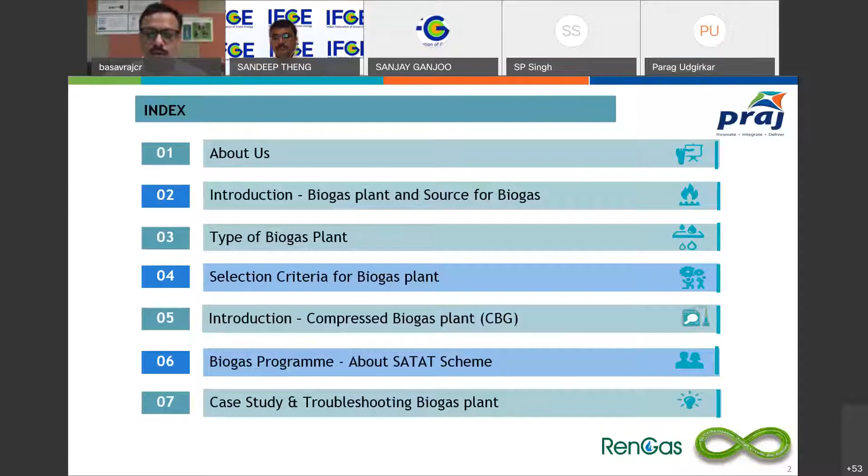So, in a couple of slides, I'll talk about Praj Industries, and then enter into the subject - what is a biogas plant, what sources are required, and the different types of biogas digesters. The types of reactors available for small scale, large scale, and industrial application, and the selection criteria, how we should be selecting. Then introduction to how, once biogas is generated, it will be used as a gaseous fuel called CBG or bio-CNG, and the very ambitious program of Government of India, the SATAT program - I'll touch upon that, and some case studies and troubleshooting, so how input output looks like for a typical capacity.

So with this, some corporate information about Praj Industries. It started in 1983 by our promoter chairman, Dr. Pramod Chaudhari, and since then he had a vision that we should be backed up by an R&D center.

Since then we have had R&D in-house supporting all the technologies. Later on, we had an IPO in 1994, and then we ventured into Southeast Asian markets like Thailand, Philippines, Singapore, and all. Then gradually we moved to the American market, and then we set up Praj Matrix R&D centers.

So we were there in 1G bioethanol—when I say 1G, the ethanol generated from sugary, starchy feedstock. Then in 2008 till 2014, we scaled up second generation bioethanol, meaning biomass-based or cellulosic, lignocellulosic-based bioethanol technology.

And then we entered the high purity segment through inorganic growth, acquiring Neela Systems. Then we had our first integrated 2G biorefinery, which we entered in 2017 onwards, and then we have gas—RNG, renewable natural gas, which we call in other terms compressed.

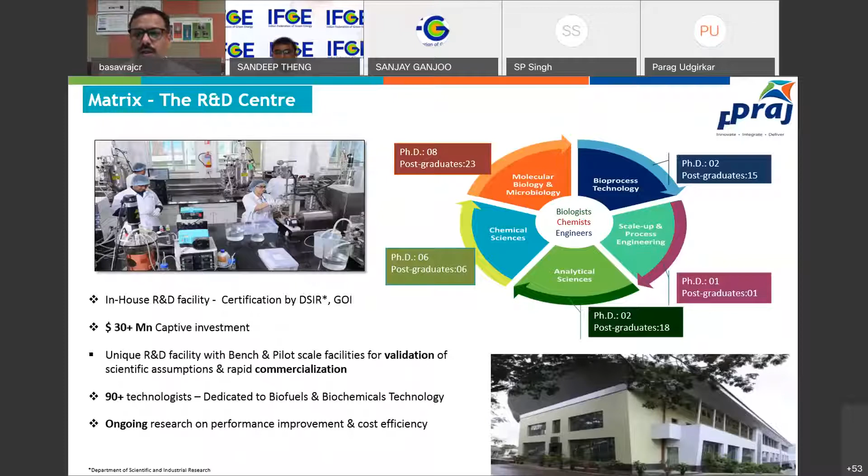As I said, the matrix is the backbone of our technology. Our R&D center's major focus is on bioprocessing technology, and biogas is also part of that—that's why I'm giving this background, to show where we are coming from. We have developed our proprietary consortia for pre-treating raw materials and processing them to increase biogas generation in the anaerobic digesters.

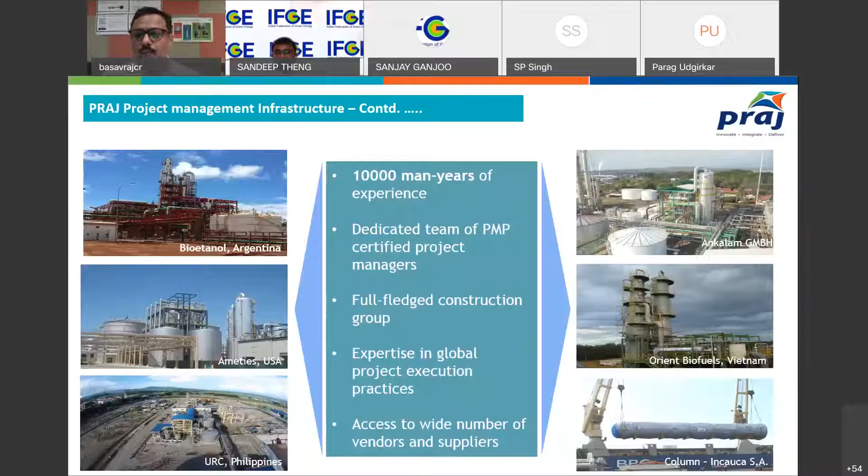So we have a very strong project management team to support large-scale project execution in Argentina, US—we have executed projects in the US. The largest ethanol plant we have executed is in the UK, a 1,200 KLPD ethanol plant for Vivergo. So these are some glimpses.

With all this, what is our drive? We want to contribute to biomobility for the country's drive—biomobility which will decarbonize through circular economy. As we know, the major demand of GHG emissions comes from the transportation sector, and stubble burning is causing a lot of issues in the northern part of India. So how do we cater to this, and what alternative solutions do we have wherein we can generate energy out of it?

It could be biogas or bio-CNG or ethanol, and our colleague Mr. Ahujaji already mentioned briquettes are there too. So there are a lot of other solutions based on permutation combinations available and the availability of raw material, and we have to offer the solution. So biomobility is based on transportation, helping carbon footprint.

With this background, I'd like to enter into the subject. So just as an introduction to biogas—what is biogas, basically? Biogas, by definition, is when we degrade any organic matter in the absence of oxygen, it releases some gas. That gas is called biogas, and this reaction happens in anaerobic condition.

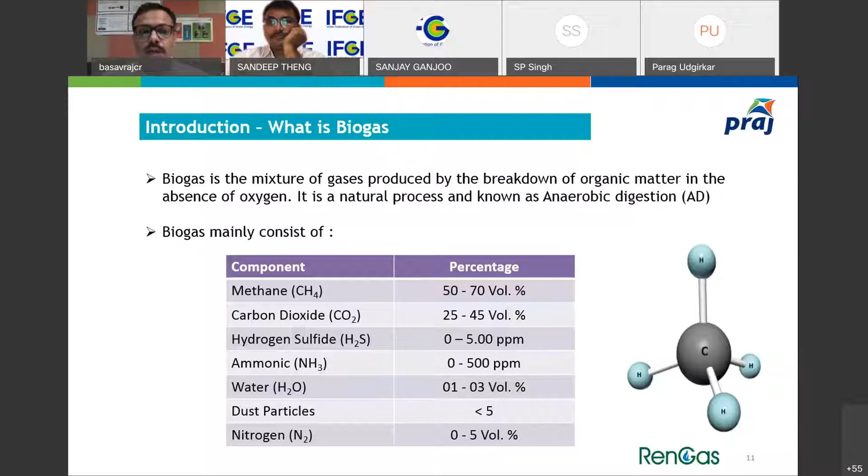So how does this biogas plant help in terms of reducing—why should this biogas plant exist? In the first place, this solves the problem of treating effluent at industry grade. If we have to treat any organic effluent, and it has a COD/BOD ratio of 0.5, that can be treated through biomethanation.

Earlier, biogas used to be treated through an aerobic route. This aerobic route consumes a lot of energy, and if I treat the same waste—any organic waste, solid or liquid—it needs a lot of energy through the aerobic route. Similarly, if I treat this through the anaerobic route, I need very minimum energy input, and it will generate one more renewable energy called biogas, which has more than 50% methane content.

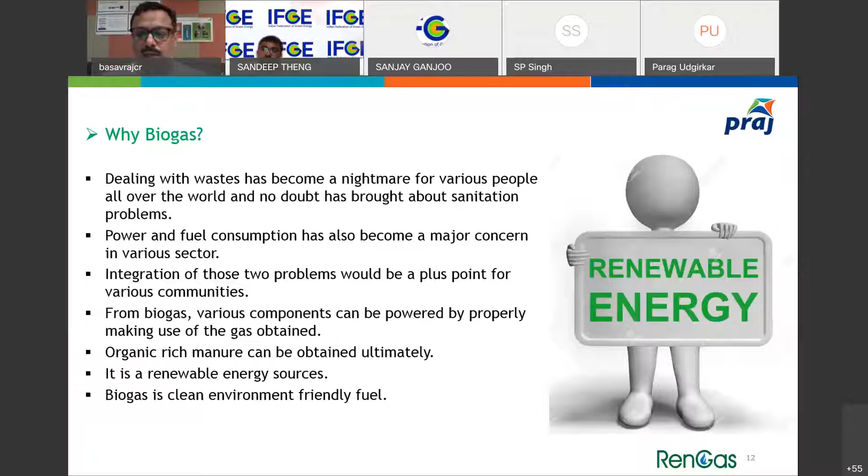This gas can be used further for various applications, which we will look into. Apart from that, it generates two more co-products: organic manure in the form of solid and liquid organic manure. So in a way, the biogas plant gives three outputs: one is gas, and the other two are solid manure and liquid manure.

So what are the sources of biogas? As I said, organic waste from commercial or industrial establishments could be food waste, market waste, vegetable waste, mandi waste, and all those things fall in this category. And there is another source like landfill, as municipal solid waste—one way of treating this is through landfill gas.

Landfill gas is also an anaerobic process, where all this organic waste is filled in the land and covered from the top. After a year or so, gas is extracted from the landfill site, and it contains methane along with other gases. One point I'd like to highlight is it will have low methane concentration, with impure gases like siloxanes and syngas. It needs a higher level of purification to utilize it in other applications.

And one more source of raw material could be sewage waste. When we treat sewage effluent, it generates a lot of aerobic sludge, which is a very potential source for biogas generation. So in an STP, just to give a ballpark idea, a 100 MLD sewage treatment plant can generate about 200 meter cube of gas.

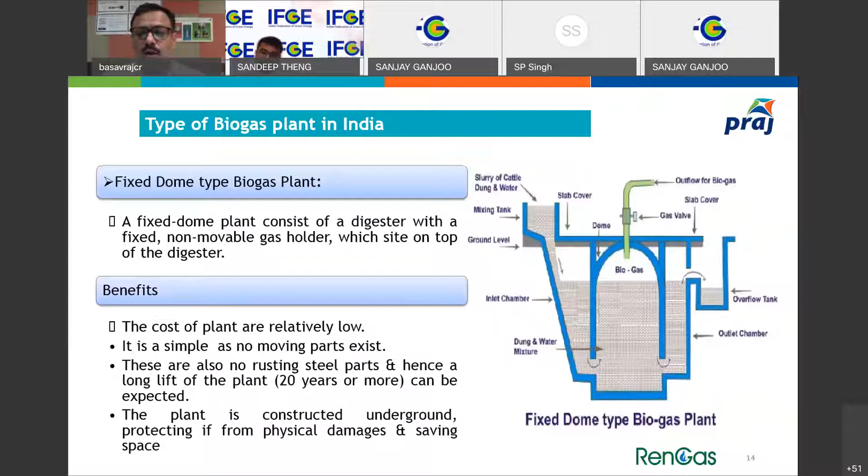There are some technologies called KVIC technology and others, but in a broad sense, these are not very big size biogas plants—around 100 meter cube or so. The second type is a floating type biogas plant, where the gas holder floats on the substrate which is subjected to degradation. It is designed in such a way that the dome or holder holds all the gas generated from the substrate.

Here again, the substrate mainly used in these kind of plants and reactors is food waste and cattle manure. Whatever gas is generated is stored in the gas dome, and it has been designed in such a way that the gas is not allowed to escape from the reactor.

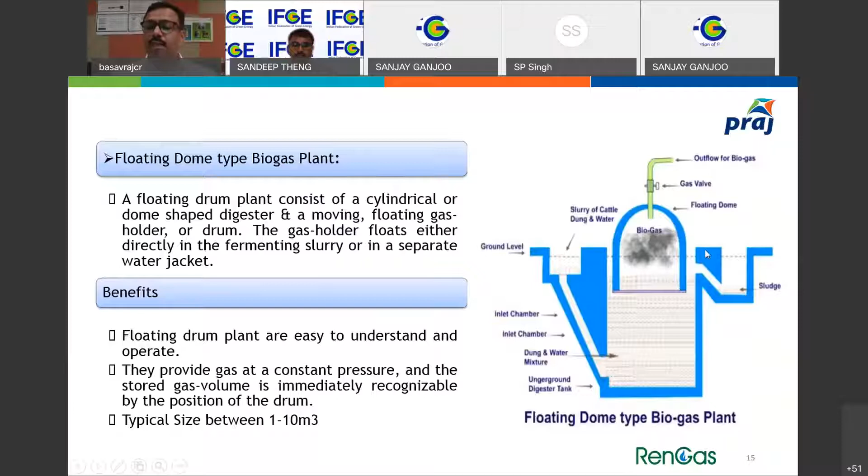So these are the plants which are available. The next level of industrial reactors available in the market, which we are also offering, is a plug flow reactor. These are available in both operating conditions, mesophilic or thermophilic.

Some designs have an agitator inside the reactor, but in our process we don't use any agitation. We mix the substrate through gas mixing, which has a lot of advantages because the operating cost is very low, and the important point is all kinds of feedstock can be treated. It has a distinct advantage. When I talk about the reaction part later, I'll cover how plug flow reactors are better compared to other conventional technologies.

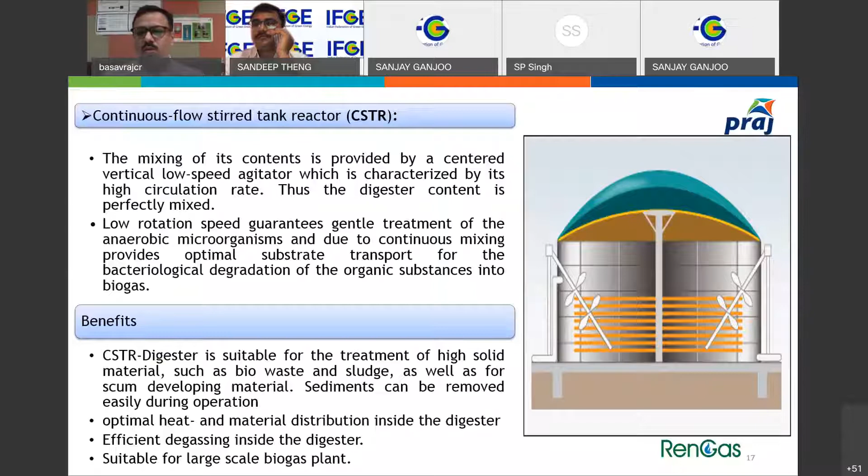So what are the factors affecting biogas generation? As we all feel, biogas plants - we've seen it from our childhood - it's a very simple process. But when we talk about industrial plants with the economics around it, when we are investing, we need to do it properly. It has to be a properly engineered biogas plant. It can't be just a reactor where I subject some substrate and some gas will come out. Because we are investing heavily in these reactors, and to establish this complete project, we need to consider a lot of factors while designing and operating the reactor.

So the important parameters - we need to have the right pH in the reactor. When I say right pH, what is it? It should be in the range - it should not go below 6.8 and should not go beyond 7.8. Why is this pH required? Because of the generating bacteria - probably I'd like to use this slide to explain this.

The second, third and fourth phase of this reaction - I'll talk a bit on phase 1 and phase 2 - but to give an example to illustrate, these methanogens are active only within a certain range and are very sensitive to pH. So if pH goes below 6.8, the methanogens will not be active. If these are not active - and the major focus of this entire process is to generate more methane - so if this consortia are not active, or dormant, or if they die, as I said, they are very sensitive towards pH and temperature. So we need to maintain appropriate pH in the range of 7.

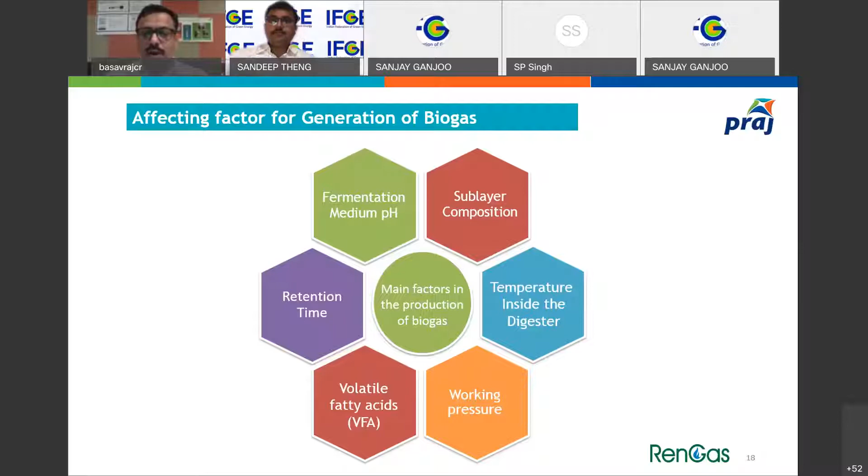And then the appropriate retention time is a very important parameter. Coming to the reaction process, how the entire biomass or organic fractions get converted to biogas: it has 4 distinct processes which are very much required to get very high concentrated methane in the biogas and the desired yield of biogas per ton.

I would like to mention these reactions distinctly. If I use a feedstock like spent wash, here phase 2 and phase 3 are very fast reactions. For that matter, even phase 1 hydrolysis is also very fast. But in the distillery spent wash also, phase 3 to phase 4, acetogenesis to methanogenesis, is a slow reaction.

But when I'm talking about other feedstocks like biomass, press mud, and food waste, the first 1, 2, 3 phases get elaborated and need more time. That's the reason this has to be operated under 2 different operating conditions. And there is a very high probability, when it comes to biomass based feedstocks, if it has diglycerides...

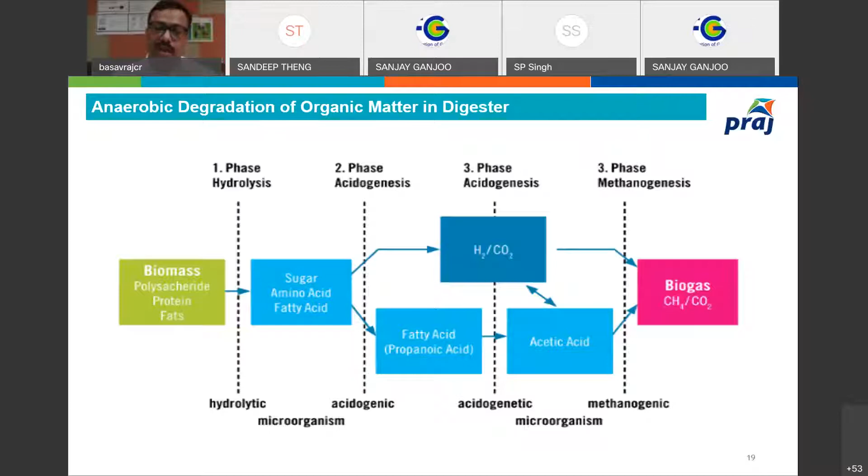...and when I say rice straws and such, polysaccharides generate propionic acid, which is very toxic to methanogens. So we need to do the proper analysis of what level of propionic acid is there. We have established, for a particular feedstock, some level of these acids that should be maintained in the reactors, and based on that we operate our plants.

With all these due considerations, there are still some issues around these kinds of biogas plants. The problems we generally face in biogas plants are: gas yield gets dropped during the course of operation, methane concentration drops, there is a huge possibility of foam generation in the reactors, and there is a possibility of pH getting dropped.

These are all the most probable causes. The possible causes for this could be reduction in the feed to the reactor. We assume, let's say, 100 tons of rice straw is fed every day, but actually if only 80 tons per day is fed, then we tend to depend on the operators. We need to keep a complete eye on the operational crew also, to check whether the desired quantity of substrate is fed or not.

When the methane concentration drops in the reactor, the possible reasons could be either the temperature drop, or the volatile fatty acid has increased in the reactor, or the reactor is operating under high pressure. All these parameters need to be checked. That's the reason we operate our flow reactor at a very minimal pressure. With these kinds of feedstocks, there is a possibility of foam generation and scum generation, and we need to know how to break these foams and scums.

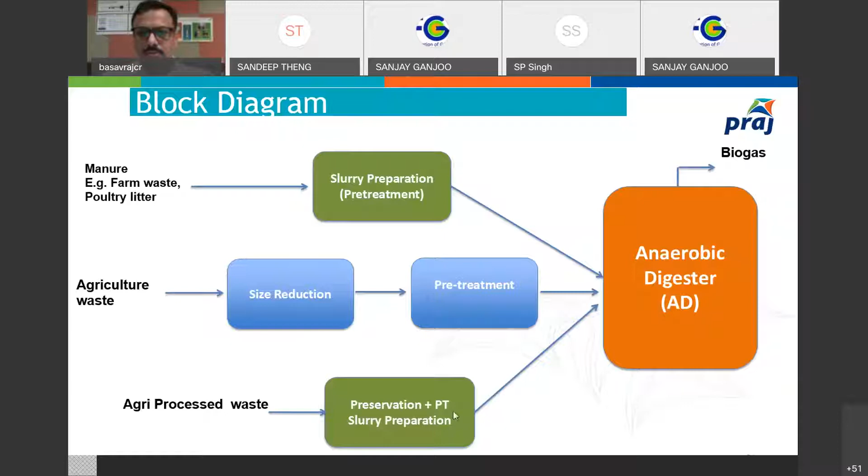So I tried to give a complete overview of how it looks like with different feedstocks. As I explained, three different feedstocks like farm waste, industrial waste, kitchen waste, and agri waste. Based on the feedstock, the level of pre-treatment varies, and then it's subjected to the reactor. After that, it will have three products.

The main product would be the gas, and this gas we subject to compressed biogas. Before subjecting it to the compressor, we need to purify it to bring down the impurities present in the biogas. As I said, the biogas has a composition of about 55 to 60%, or maybe higher. We need to bring this to 90, 95, 96% purity level, and then we can compress it, and it can be used for different applications like transport fuel or gaseous fuel.

The second application of it could be the CHP process, combined heat and power. At this level, we don't need a very elaborate gas purification system, but we need to desulfurize the gas. As I said in my previous slides, it will have H2S content present in the biogas. We need to remove that, which we call desulfurization, and bring it to the level required depending on different engine makes and power output. These engines' efficiency could vary between 35 to 44%, and the waste heat recovery can be used for steam generation or other applications.

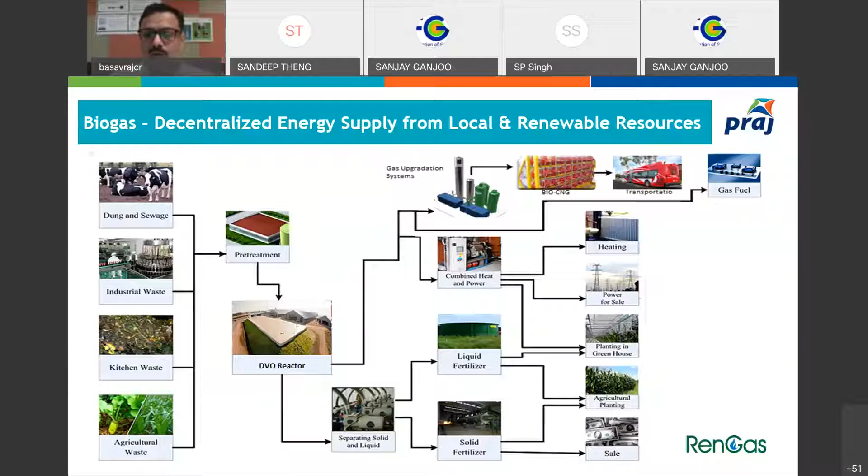The other co-product coming out of the biomethanation process is subjected to solid liquid separation, where slurry from the reactor is separated, and then it goes to organic manure. Recently we got the fermented organic manure certified under FCO also, which is very welcoming news for this industry, the biogas sector per se. The liquid manure coming out can also be further used as liquid fertilizer.

As I said, four distinct components are required while selecting a biogas plant. We need to consider what substrate I am using, whether it is the right quality, and the availability of logistics. PRSPL will explain more on the logistics part, like collecting rice straw and such from a distance, at what radius we can consider, otherwise the transportation cost will increase.

What quantity of substrate I am bringing, the type, and the next selection criteria would be what kind of reactor I am using. As I already mentioned, all the different types of reactors have their own advantages and limitations. Proper sizing of the reactor is important, it should not be undersized or oversized, looking at the economics.

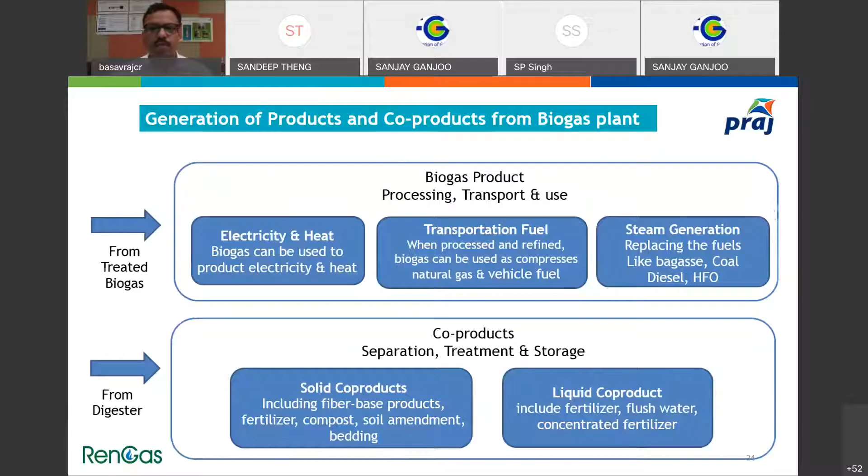So what is biogas, and what are the different synonyms of CBG? As I said, the methane composition in CBG should be more than 90%, as per IS 16087:2016. The initial gas, based on the raw material, could be anything between 35 to 65%.

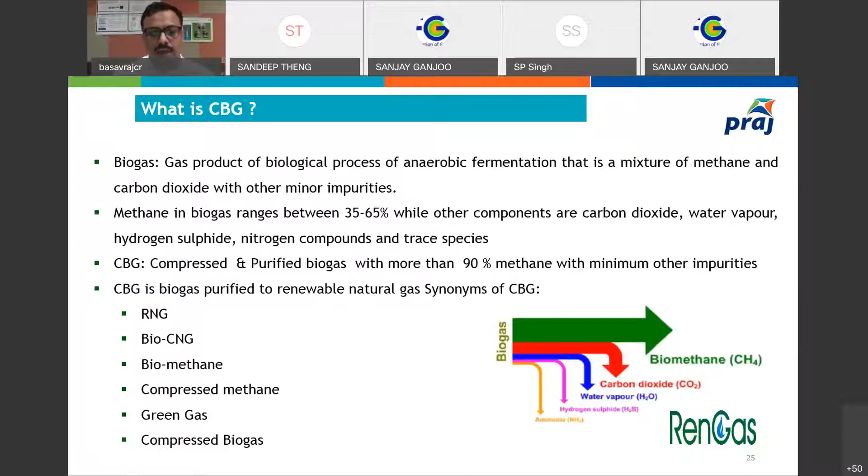This biogas, as you can see in the diagram here, we are stripping out all these impurities: carbon dioxide, moisture, hydrogen sulfide, ammonia, nitrogen. We are only interested in the methane. Once we strip out all the impurities, that is called CBG, or biomethane, or purified biogas. In Western countries it is called renewable natural gas, especially in the US, biomethane in Europe, and compressed methane, green gas, or compressed biogas/bio-CNG in India.

So how do the compositions of CNG and CBG differ? The methane concentration in both cases is 90%, as per the specs mentioned. But in case of CNG, we have other hydrocarbons, whereas in case of CBG, we don't have any other hydrocarbons, and there is a cap on CO2 of not more than 4%.

Since I don't have other impurities, nitrogen, CO2, and oxygen all put together should not be more than 10%. In that case, if I don't have nitrogen and other impurities, maybe 0.5 milligram per meter cube for oxygen and others, eventually I need to increase the concentration of methane to 95-96%. So it all depends on the substrate I am using and what composition of biogas I am getting.

So we discussed, as we've covered till now, the biogas plants and what parameters we need to keep in mind in operating the plant. And once the biogas is generated, how I am going to purify it to get CBG grade quality.

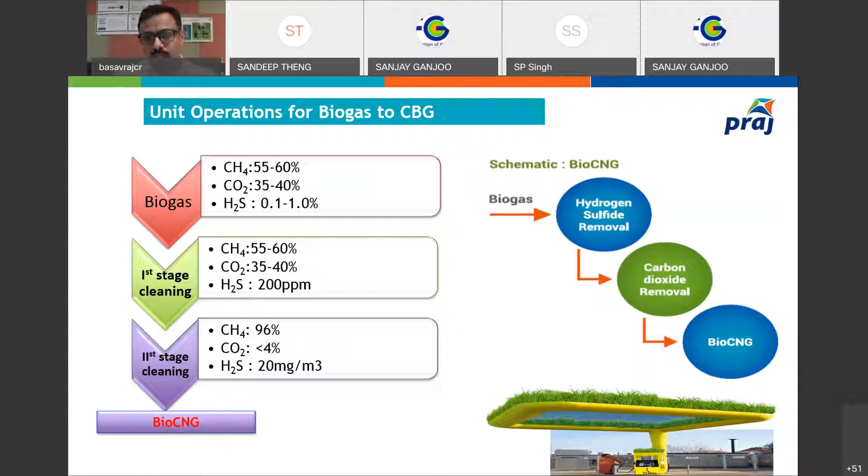It needs a foolproof desulfurization process. As we all understand in the industry, hydrogen sulfide is a very corrosive gas which needs to be removed, to bring it down to 20 milligram per cubic meter. So we should have a very rugged desulfurization process, then a CO2 removal system and a moisture removal system. There are three distinct unit operations required to get the desired CBG.

As I said, we are in collaboration with DVO Inc, United States of America. So we are offering a plug flow reactor. What are the USPs of the plug flow reactor?

As I mentioned earlier, here we can achieve hydrolysis and acidification in the first part of this reactor. This is like a plug flow, a rectangular reactor. You can see the flow path: the substrate is moving like this, then taking a U-turn, and it is going out.

In the first part, we are maintaining different operating conditions, and when it comes to stage 2, we are maintaining different operating conditions. One more important point about the plug flow reactor, which we can't do in a CSTR, is that we can maintain SRT.

In case of plug flow reactor, what we are offering is SRT equal to HRT. SRT is solid retention time, which is equal to hydraulic retention time. The solids coming along with the feed substrate, or the total solids, will have a similar retention time, because there is no channeling or short circuiting possible in this reactor. So along with this liquid substrate, also the solid has to go out.

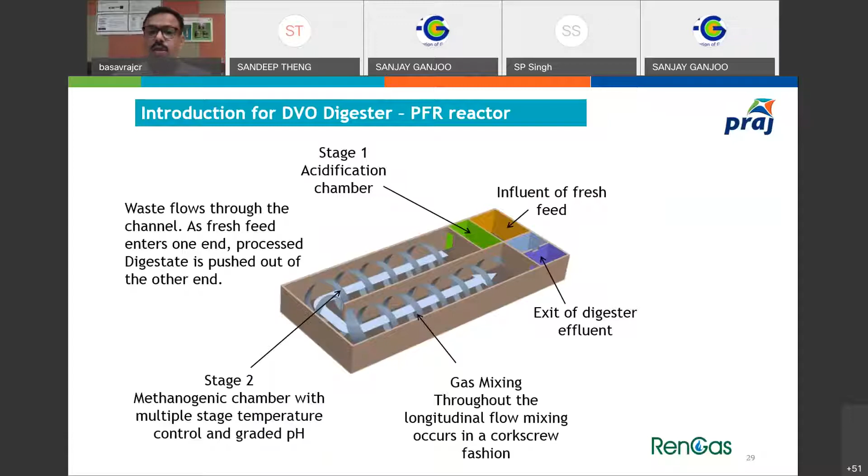That's the reason we have same SRT and HRT in case of plug flow reactor, which is not possible in case of conventional reactors. Once this gas is generated, we should have an appropriate desulfurization process. Based on the H2S levels in the biogas, we offer different kinds of desulfurization processes.

This is an iron chelating agent based desulfurization process, where we use the iron chelating agent as a catalyst to remove the sulfur present in the form of H2S, which gets converted to solid. You can see the sulfur coming out to this filter press, and the liquid, the iron chelating agent, is taken back for regeneration, then recycled back to the main reactors for further desulfurization of the raw biogas.

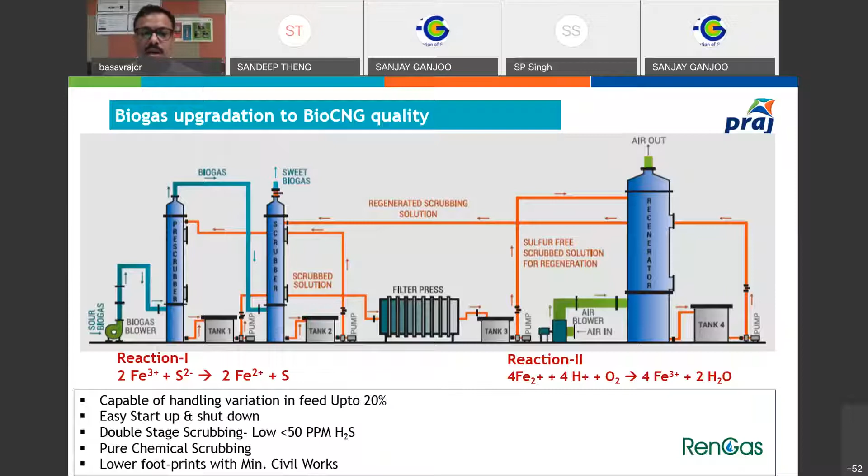The advantage of this is a very minimal quantity of sulfur chemical is required in this process. It is chemically self-regenerative in the process itself, so we only need to top up a small quantity for desulfurization. We also have an alkali-based scrubbing system, and based on H2S levels, if the chemical requirement is very less, we offer that technology as well.

After desulfurization, the second important part is we have to remove the CO2 from the biogas. In our technology basket, we offer both chilled water scrubbing process and membrane scrubbing process, and both have their own advantages and limitations.

In the chilled water process, the raw biogas after desulfurization is compressed up to 7 to 8 bar, then subjected to a scrubbing column, wherein the chilled water absorbs the CO2, and pure methane of more than 90% comes out. It then goes to the drying system, which is molecular sieve based, where moisture is taken out, and we are able to achieve the IS specs.

What happens to the chilled water used for the scrubbing process? We regenerate it back through the regeneration system. Once we flash this CO2 rich water, it liberates the CO2 out, and the water can be reused.

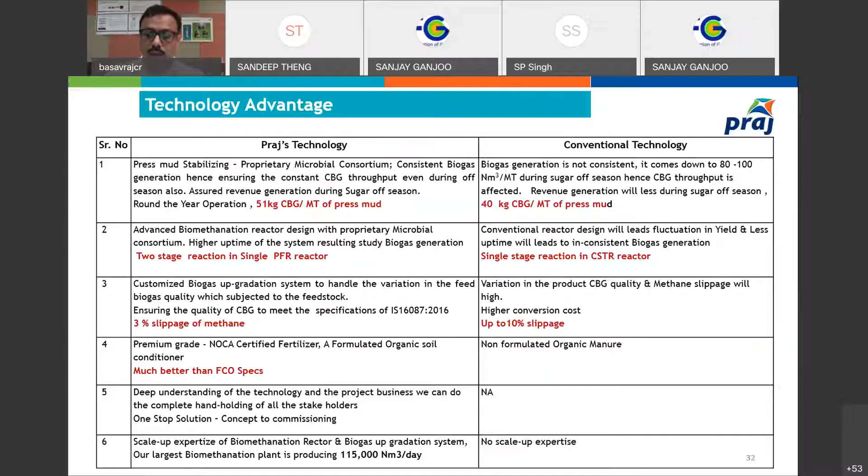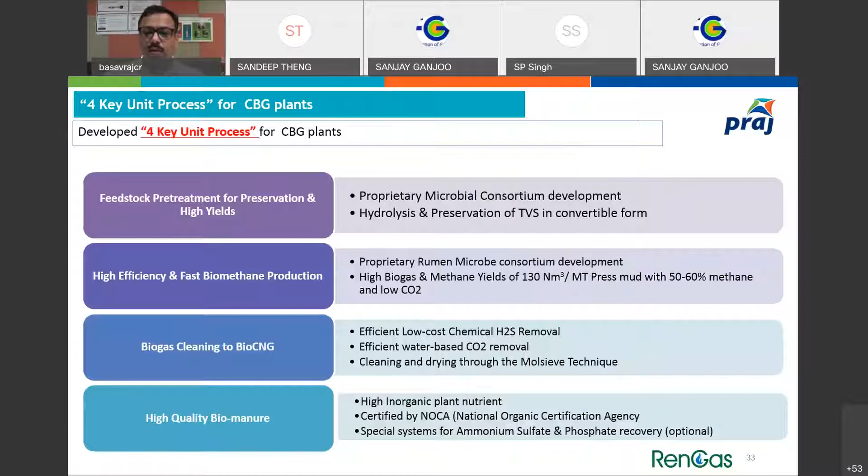We have learned with our experience of the distillery spent wash business. These are the 4 key unit operations which I mentioned. Because of that, we are able to get the highest yield, better gas purification system, and high quality organic manure, NOCA certified. These are some of the credentials where we got the NOCA certified manure certificates and all.

To take a typical case study, if I take an 8,000 TCD sugar factory, and it operates at 190 to 200 days, it will generate about 60,000 tons of press mud. We can have about 200 TPD of press mud available for round the year operation. The typical composition of press mud is about 25 to 30% solids, of which about 80% is volatile matter, and the remaining is moisture.

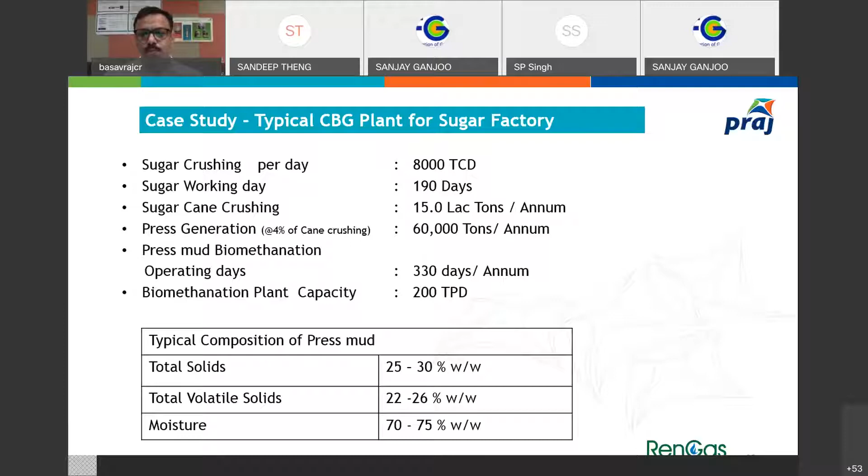So in all, the expected outputs with 200 TPD of press mud would give about 10 tons of CBG, solid fertilizer about 40 tons per day, and liquid manure in the range of 100 m³ per day.

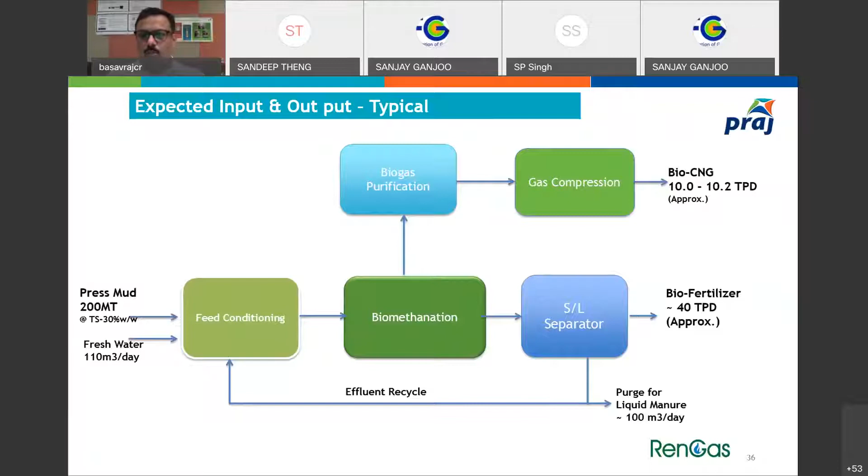If I want to use the similar feedstock for a biopower case, I would be able to generate about 2.5 megawatt of power with this kind of plant, with a capacity of about 200 tons per day process.

Why underground is preferred is the temperature. Maintaining the temperature of the reactor is very critical and important. Below 1 meter or 2 meters, the temperature variation of the reactor is minimal. That's why we should have underground reactors.

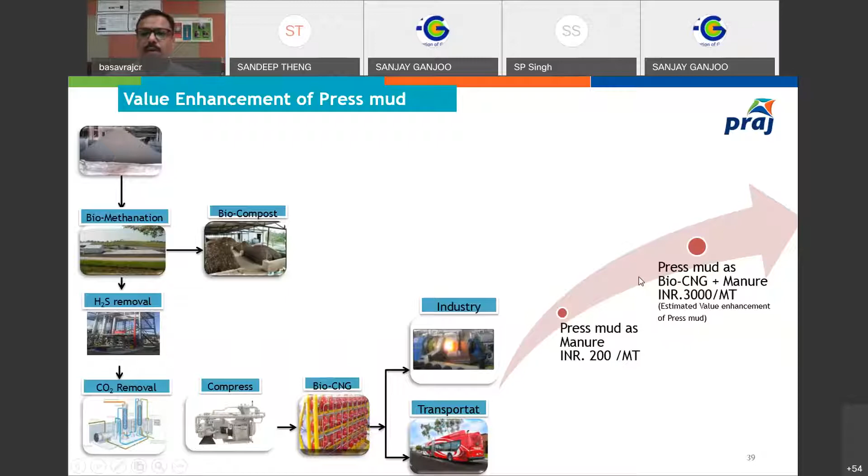So this is our pilot, followed by demonstration level, what we have done at Shreenath Mhaskoba Sugar Karkhana, which is near Pune. Just to show, we have achieved up to 98% methane in that.

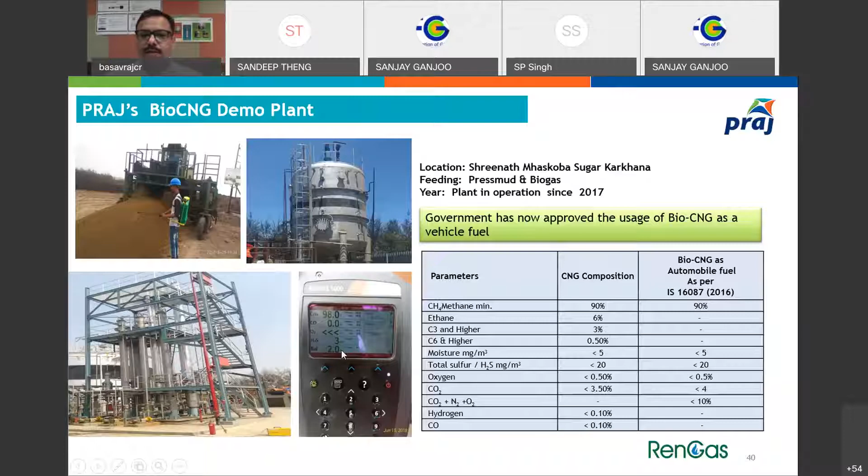And these are the few reference large scale plants I was referring to. We have built a 22,000 meter cube reactor for Triveni Engineers, who are well known in the industry for their turbines and all.

And Bajaj Hindusthan Kinauni, one of the leaders in the sugar belt in northern India. We have 3 projects with them.

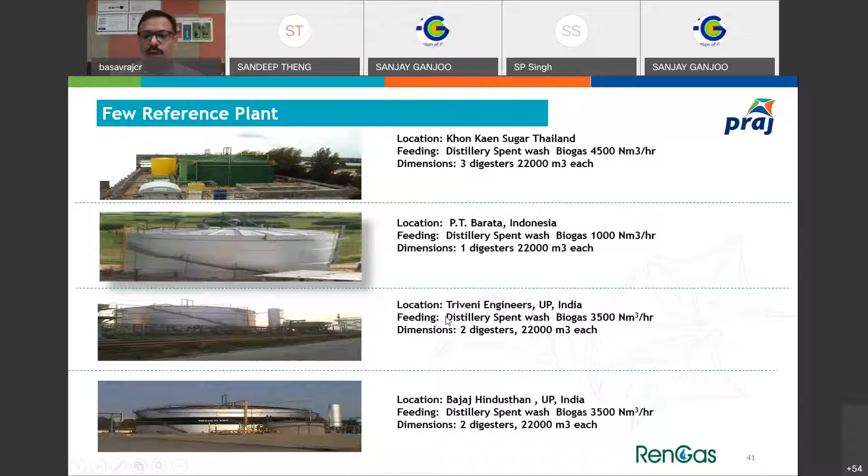Another reference is we are coming up with a big large scale press mud to CBG project with Indian Potash in UP, which is under commissioning and will be commissioned very soon.

As I mentioned, we have our own demonstration plant from where we have developed technology at our R&D level. We take a very pragmatic approach as an organization: first we develop any process technology at pilot, then bench level, then demonstration level, and then commercial level. The similar approach we are taking here also.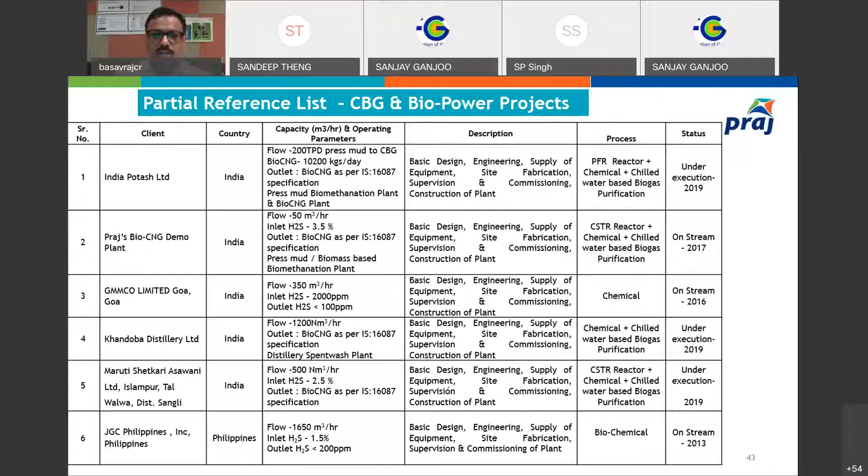And as I said, we have gas purification plants in a couple of other locations.

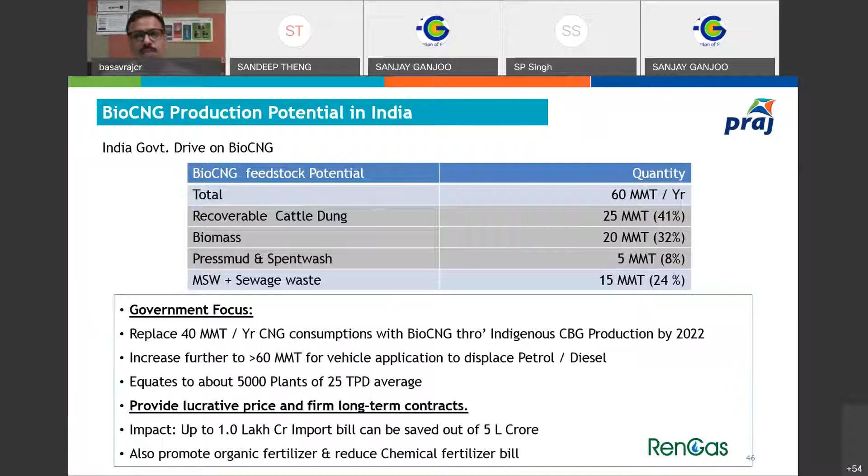However, MSW and cattle manure are not raw materials available at one single location; they are all scattered. Whereas sugar factory press mud is an organized and assured raw material available at one location.

So, what are the biomobility pillars? Make in India, Swachh Bharat Abhiyan, doubling farmer income.

Rice straw is burnt in the farms, which gives no value or revenue to farmers. If rice straw based CBG plants are set up, and if we stop stubble burning and start making biogas from this and then CBG, farmers' income will be doubled.

And energy self-reliance, which is the major drive the government of India is taking, fits into this. There's a lot of push to secure the energy requirement of India. So as an industry, we need to encourage this opportunity to take it to the next level.

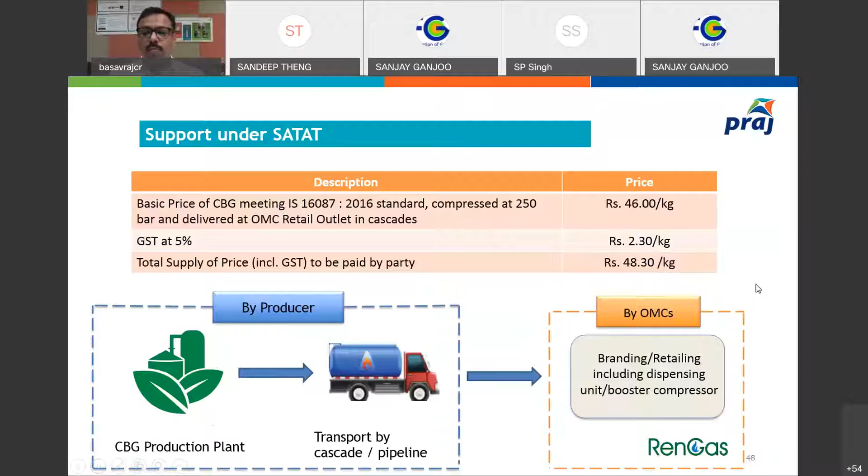This is how the producer will make the biogas, then transport it to the OMC, and through a dispensing station, it will be sold under their brand name. So with this, these are the long-term prices which Indian Oil is assuring.

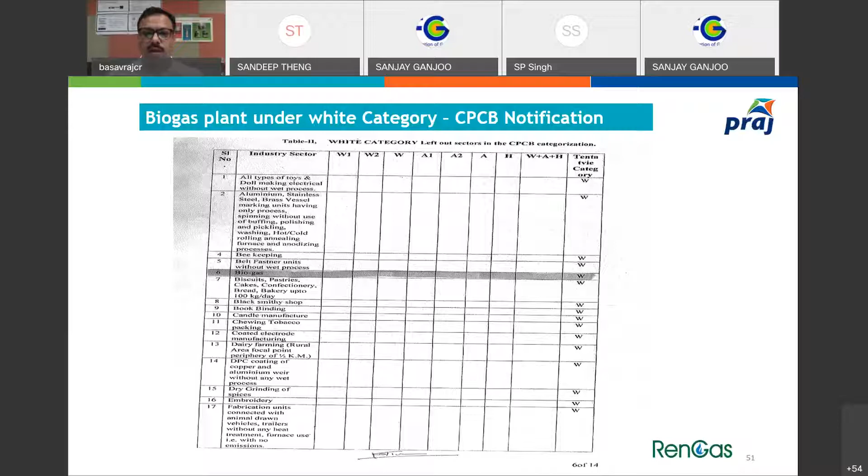The biogas plant comes under white category or green category. Some states are very progressive; they have taken steps and already declared these biogas plants under white category. Along with that, there is central financial assistance—MNRE is giving subsidy to these projects. For a typical 4.8-ton CBG production, you will get about 4 crore as capital subsidy, equivalent to 1 megawatt, with an upper cap of about 10 crore rupees per project.

And if it is distillery-based, where the biogas plant is already available in the premise itself, in the factory itself, and if they go for gas purification, compressing and filling, then in that case MNRE will give around 3 crore subsidy.

With this, I would like to conclude my presentation, and we will be happy to answer if you have any questions.

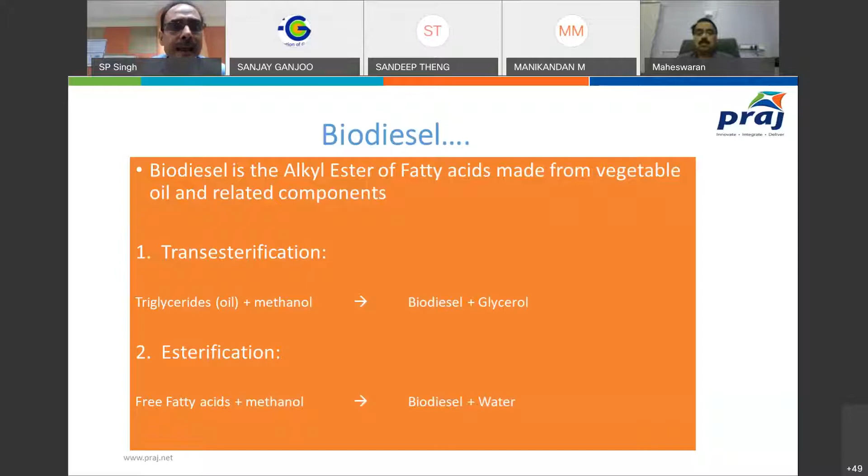If you see a simple comparison between diesel and biodiesel - composition in diesel is basically alkanes and alkenes, however in case of biodiesel it is 96.5% FAME, fatty acid methyl ester. Raw material for diesel is crude oil, and here vegetable oil, basically used cooking oil. In addition, you can use other feedstock like tallow and PFAD, palm stearine also for making biodiesel.

And if you see the emission as compared to diesel, which is 185 to 229 grams of CO2 generated per kilometer drive, here it is less than 50% of this CO2 generation per kilometer drive.

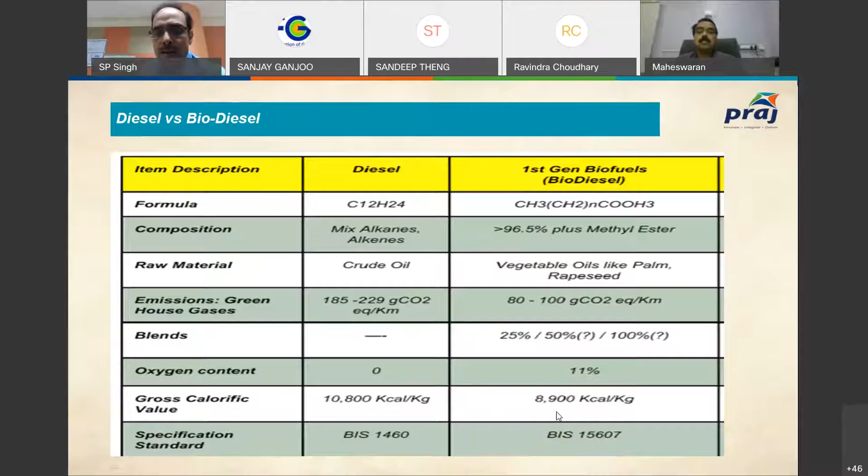For blends, diesel of course we can use as such 100%, but in biodiesel, depending upon availability, because the biodiesel which we are guaranteeing meets the requirement of BS6. So depending upon availability we can use up to basically 100%, but Government of India has focused, depending on availability, up to 5% maximum. Oxygen content in diesel is 0, here it is 11%. And energy-wise, diesel is 10,800 kilocalorie per kg, as against biodiesel which is approximately 8,900 kilocalorie per kg.

And these are the standards we follow for diesel and various feedstocks. In addition to used cooking oil, we can use palm oil, crude palm oil. We can use rapeseed, sunflower, jatropha, and pongamia.

In earlier days, we used to speak about making biodiesel from high free fatty acids. So the most important components for making biodiesel are basically glycerides, triglycerides, and free fatty acids. Depending upon the composition of particularly triglycerides and free fatty acid, that will decide the yield of biodiesel. If the triglycerides are less, definitely the yield will be less. If some other impurities are more, that may require a pre-treatment.

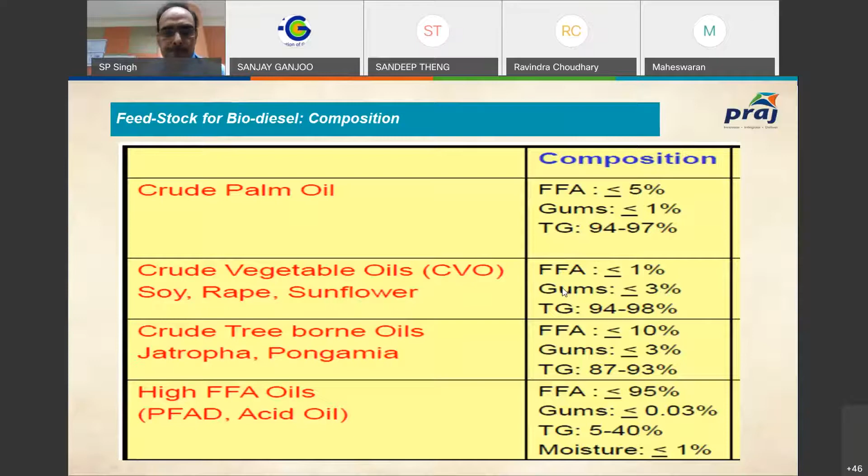So let's come to the balance. As a thumb rule, 1 ton of triglyceride approximately will give you 1 ton of biodiesel. If you want to find out the exact value, if the triglyceride is around 890, then approximately the biodiesel you will get, there is some gain due to chemical balance, is 894. And we add methanol approximately 96, and this gives us the byproduct called glycerol. So triglyceride plus methanol will give you biodiesel and glycerol.

This is when we are using triglyceride for making biodiesel. I told you the current process of chemical catalyst has limitation in producing biodiesel from free fatty acid - you have to recycle a number of times to see that 100% free fatty acids got converted to biodiesel. But in the enzymatic process, free fatty acid is not the limitation. Even 100% free fatty acid can be used to make the biodiesel. So that is the very plus point of enzymatic biodiesel technology.

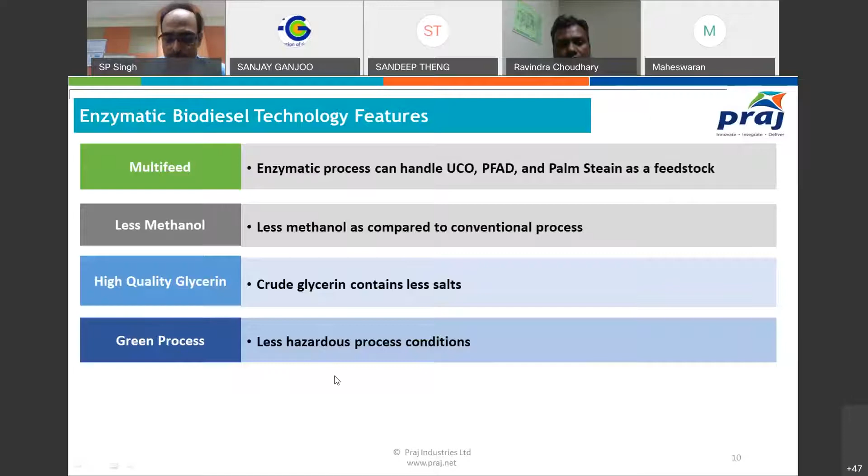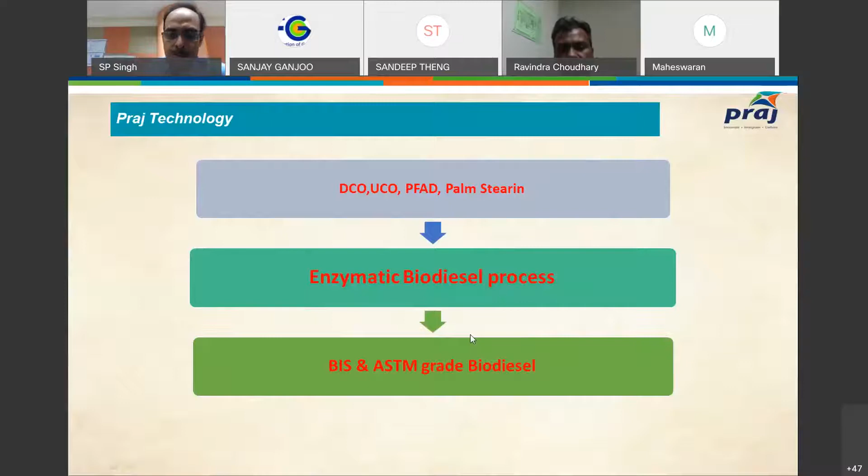Briefly on the technology: feedstock goes to the enzymatic biodiesel process, and we can produce Indian standard, ASTM, as well as European standard biodiesel. So we'll discuss it step by step.

These are the feedstocks. Pre-treatment may or may not be required depending on feedstock quality. For example, if it is used cooking oil, that may be blackish in color, so before going to the reaction process we have to remove the color. So the pre-treatment will be a bleaching process, using bleaching earth to remove the color.

But if the feedstock has more gums, which may hinder the process, we also do degumming in the pre-treatment section. After that, esterification and trans-esterification take place together in the enzymatic process, and you will be happy to know that the temperature of this reaction is very low, hardly 40 degrees centigrade, as compared to the high temperature of the chemical catalyst process. These two processes happen simultaneously.

Now biodiesel and glycerol are produced. We use some excess methanol here, which is removed by a flashing operation. Then we have a distillation column to recover the methanol, which can be reused back in esterification.

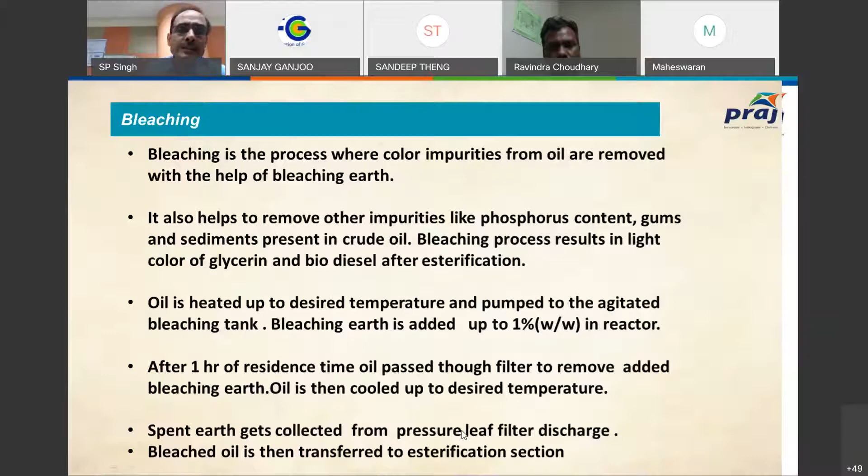After the reaction takes place, we remove the bleaching earth using pressure leaf filters, and our process ensures the oil loss through this bleaching earth is minimum, lesser than other technologies available in the market. This is a simple block diagram of the bleaching section, where bleaching earth is added, the reaction is carried out, and the pressure leaf filters separate the bleaching earth while the bleached oil goes to the next section.

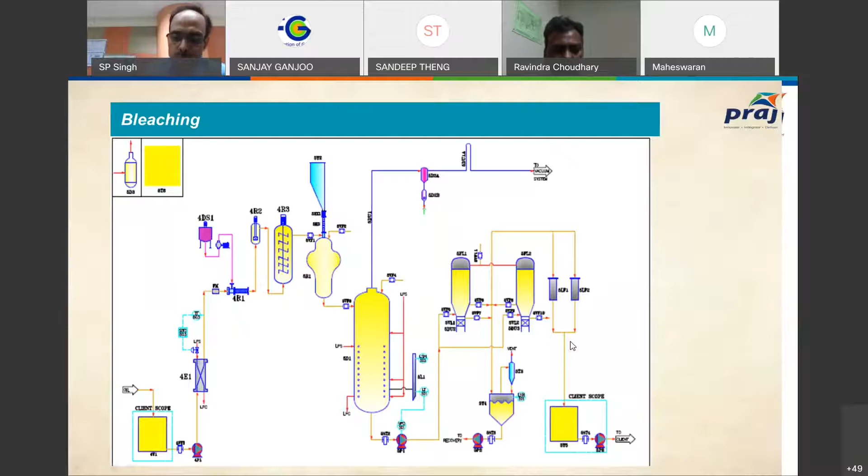Now the next section is basically the heart of the process: trans-esterification and esterification, which use enzymatic catalyst. As I discussed in the chemical balance, trans-esterification converts triglycerides to fatty acid methyl esters.

Some pH needs to be maintained, approximately 5 to 6, and enzymes act in the presence of some moisture. So unlike the conventional process, we need not worry much about moisture present in the oil, because if moisture is not there, we may even have to add water so that enzymatic activity is better in presence of moisture.

Enzyme quantity is approximately 0.25 to 0.3% of the feedstock quantity, and typically we add 20% methanol, which we recover after biodiesel is produced. Reaction time is approximately 24 to 30 hours. We can use simple, mildly agitated reactors, so cost-wise it is also not very high.

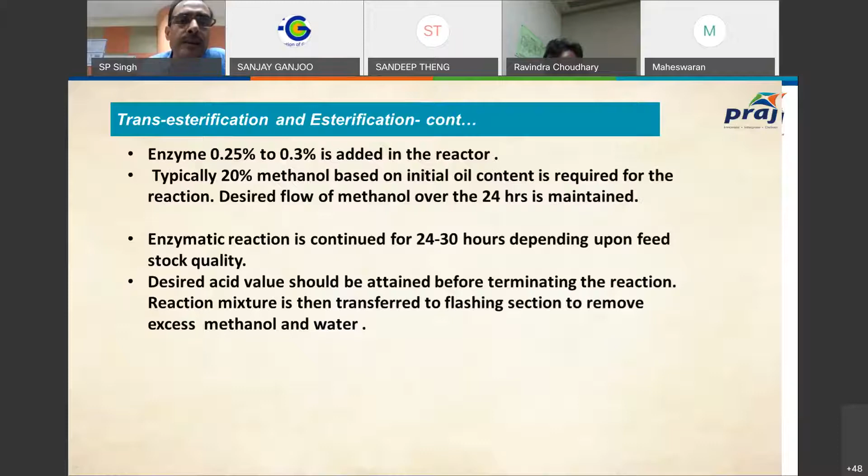We can achieve the desired acid value as per the standard requirement here, and if not, we can achieve the same in the neutralization and washing section.

To summarize the reactor process: pH is 5 to 6, temperature is 40 to 43 degrees, time is approximately 24 to 30 hours, enzyme loading is 0.3%, methanol added is approximately 20%, and water, if not already present in the feedstock, is maintained at about 2%.

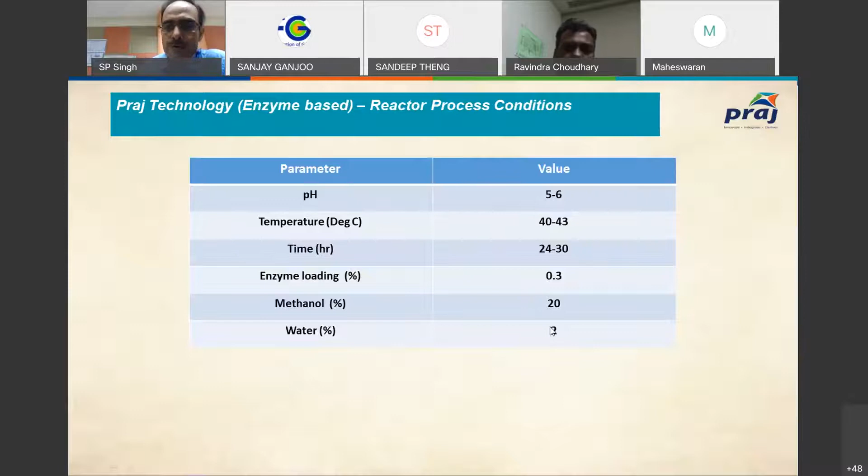This reactor can be simple and agitated; mild steel will also do. But for international markets, if you are using PFAD and palm stearin, it's better to have a stainless steel reactor.

This is a typical flow sheet of the reaction part of the process. We have 4 reactors, arranged so this is a continuous process. Feed comes in from one section and continuously goes out from the system. These are additive tanks, with coils required to maintain temperature, along with agitators and recirculation pumps. This is the typical reaction part.

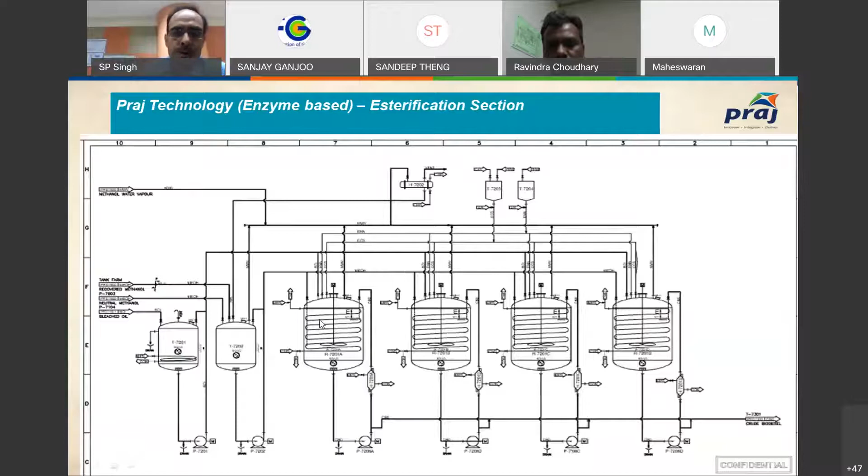The flashing process, as discussed during the block diagram, is used basically to remove the methanol. We engineer the system so that methanol loss is minimum. After flashing, we use the methanol recovery system where methanol is concentrated back to the required level and recycled back to the system.

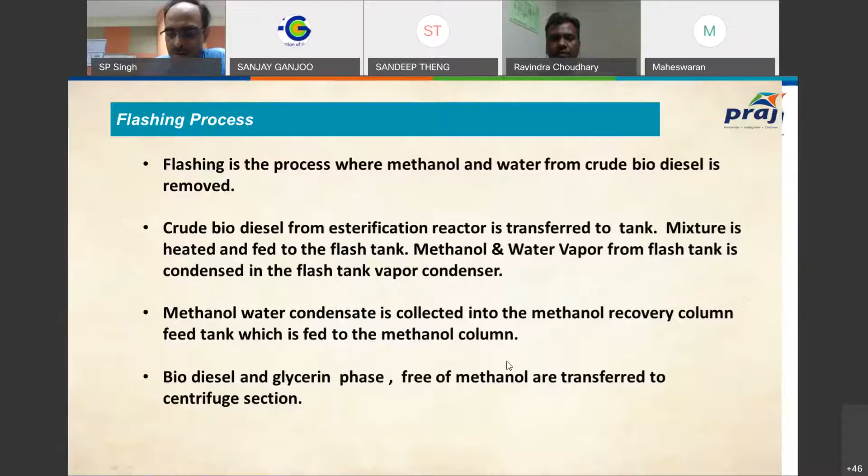So now our process basically gives a mixture of biodiesel and glycerin, with free methanol recovered. This is a typical flow sheet of the methanol recovery system, where flashed methanol is taken to a distillation column using tray type distillation, where dilute methanol is concentrated back to more than 98-99% concentration.

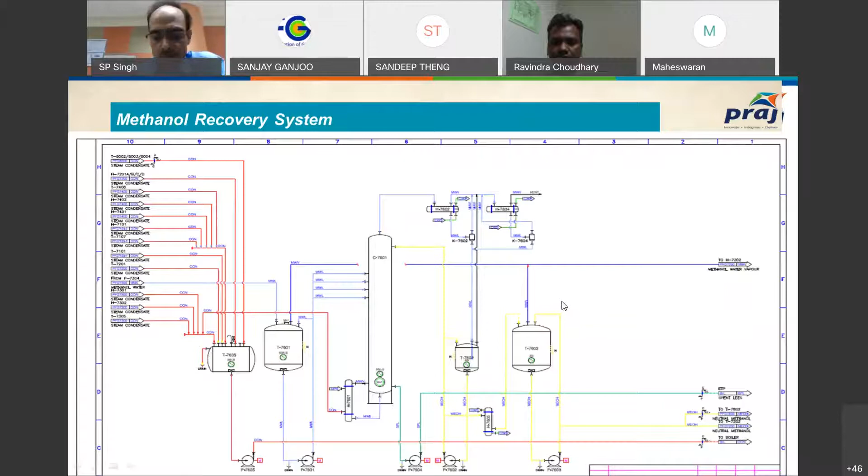So you can very well produce pharma grade glycerin when using the enzymatic process. For our glycerin separator, to have better recovery and purification, we generally prefer centrifuges. However, gravity settlers can also be used, but centrifuge is preferred with reference to better separation efficiency.

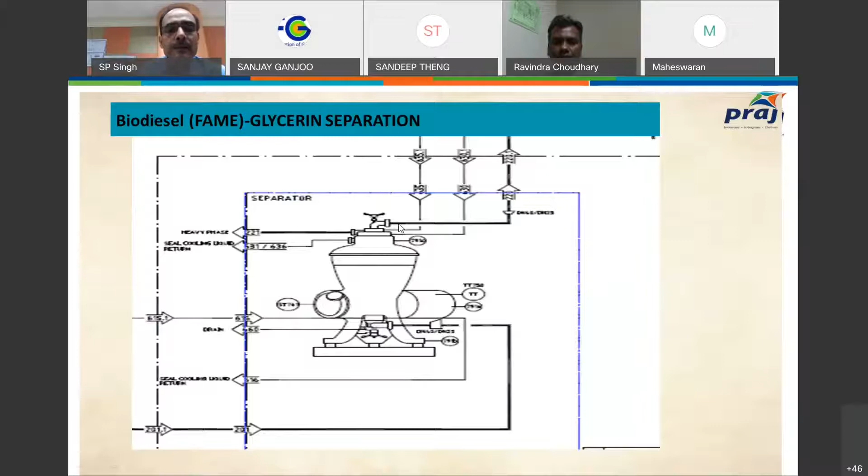Neutralization section is next. This part of the section is to meet the requirement of standards, particularly free fatty acid in the final product, which should not be more than 0.25%.

Now your crude biodiesel is prepared, heated up to 80 to 85 degrees centigrade. To neutralize excess free fatty acid, we add NaOH. Because of NaOH addition, some soap is formed, which is removed as soap stock using a centrifuge. Any remaining traces of soap are removed using a washing centrifuge so there are no traces of soap in the final biodiesel product.

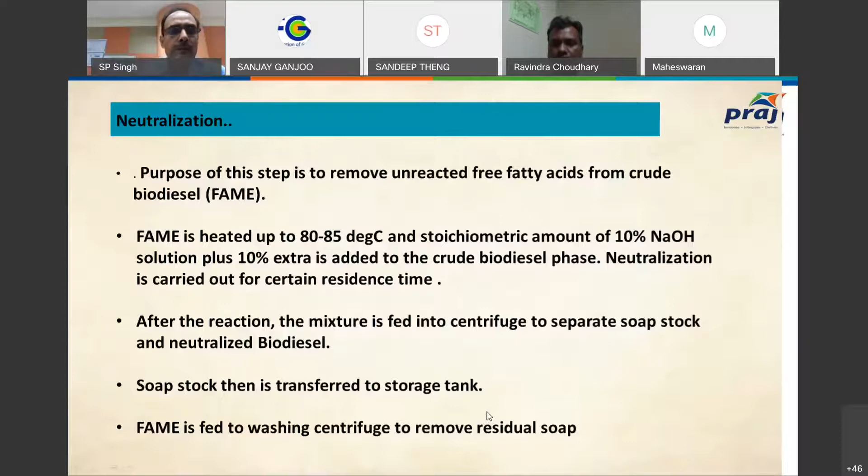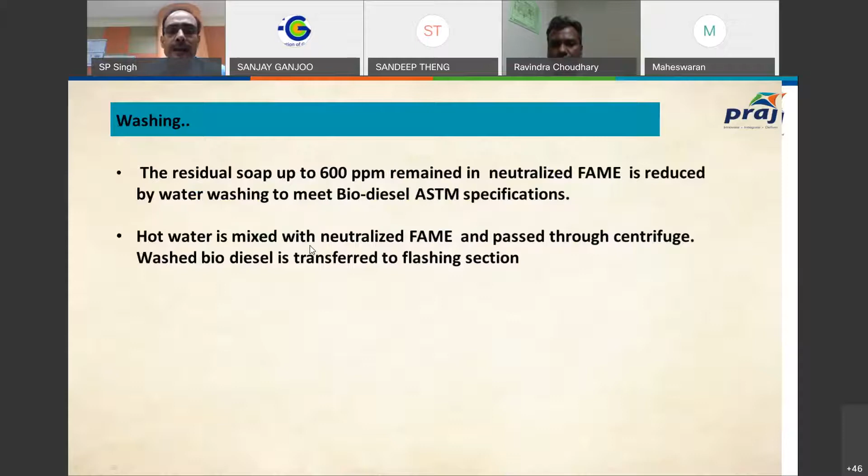In the washing section, residual soap up to 600 ppm remaining in the neutralized stream is washed again with water, and then we use another centrifuge to remove it, ensuring there are no soap traces in the biodiesel.

Next is the molecular distillation process to meet ASTM and European standards. But before that, moisture removal is needed since we've washed with water, so we go for a flashing operation under vacuum. Once moisture is removed, we take it to the molecular distillation.

This molecular distillation can be optional depending on the type of biodiesel you require. If you want to meet ASTM or European grade standards, it is a must. But if you want to produce diesel for a DG set, etc., this can be optional.

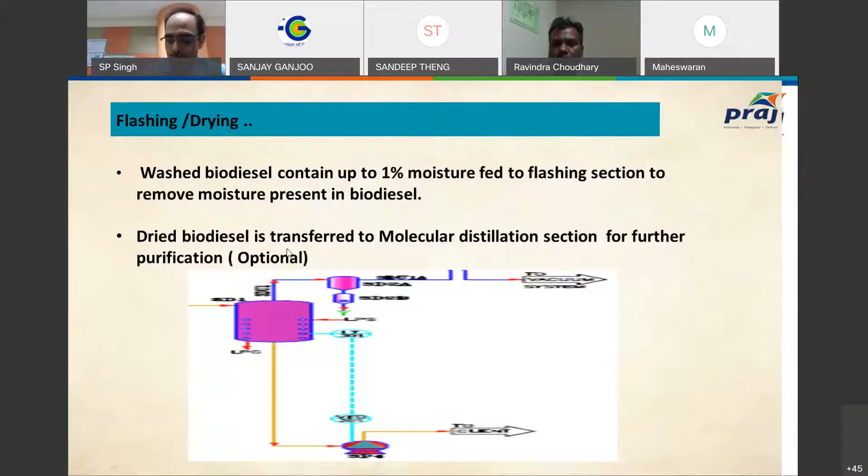Distillation is carried out at very high vacuum, generally 1 torr absolute pressure. Here, impurity separation is very good because when we apply high vacuum, the relative volatility of the impure component compared to the desired product is very, very high, so separation is much better compared to simple distillation.

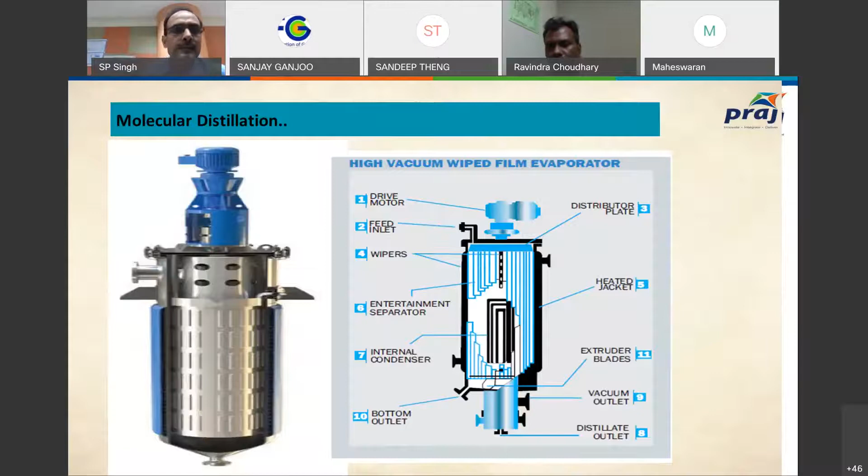The molecular distillation unit looks like this. We also call it short path distillation because we don't allow long path distillation. So now your biodiesel is ready, meeting the requirement of standards.

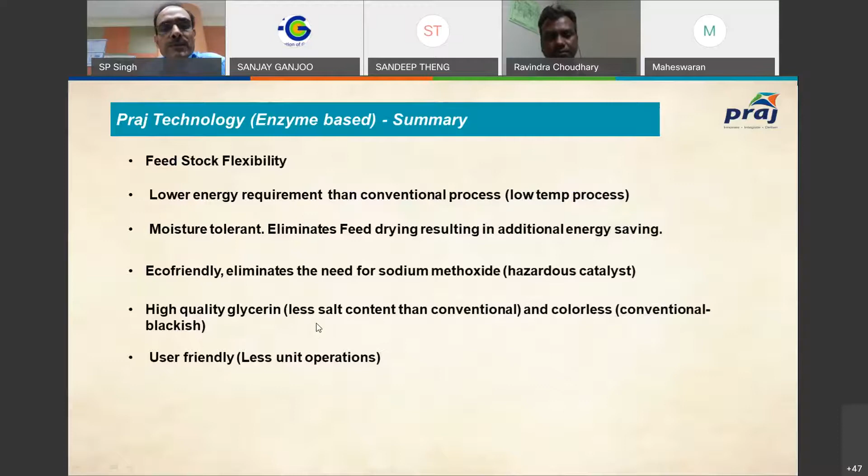So just to summarize the technical part: this process technology has feedstock flexibility, lower energy requirement, is moisture tolerant, eco-friendly, produces high quality glycerin, has fewer unit operations with not much recycling, and is a clean, totally continuous process.

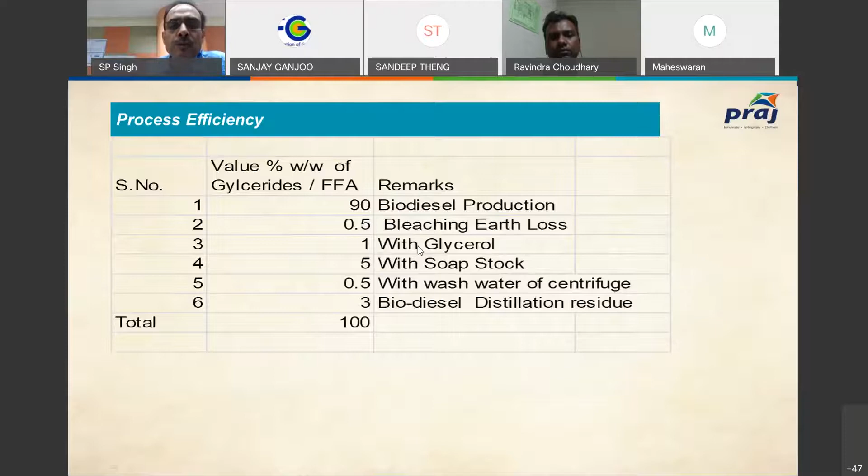Efficiency, basically process efficiency depends upon how much triglycerides you have. So minimum efficiency we offer is 90%, meaning 90% of feedstock you will get as biodiesel. What are the losses? Losses mean byproducts where the rest of 10% goes - bleaching earth approximately 0.5%, some goes with the glycerol, some is in the soap stock. So out of 100, 90% minimum will be the biodiesel production.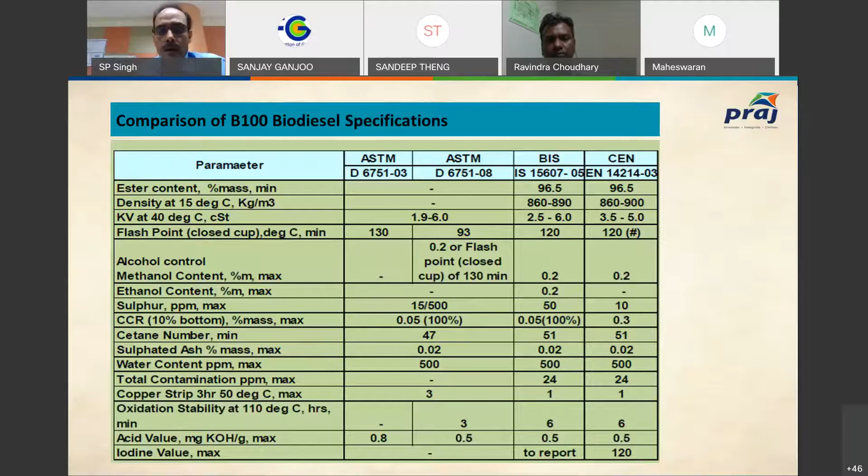And we are guaranteeing that in our process, the biodiesel will meet the requirement of acid value, which will be less than 0.5. And these are the other parameters of ASTM, European and Indian standard.

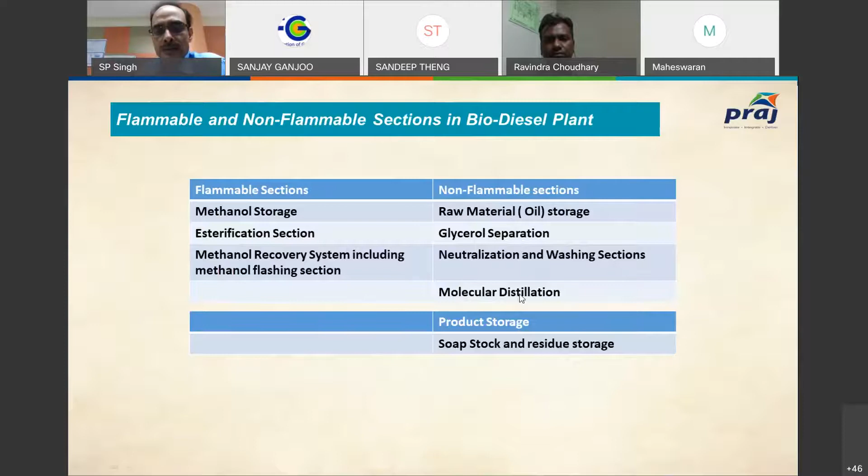Coming to the layout of biodiesel, we have a flammable section and non-flammable section in the process. Methanol storage, esterification, and methanol recovery system will come under flammable section, and non-flammable section will be the raw material storage, glycerol separation, neutralization and washing, and molecular distillation. So these will be non-flammable section.

And then the product storage, soap stock and residue storage, and finally. Coming to business drivers, because technology should also talk about the business. So we see the volatility in crude oil, and as I started with the note that first time in Delhi, diesel rate has gone more than petrol. So definitely this is giving a good opportunity for the biodiesel process.

And government has a certain policy made in place, like these are use of used cooking oil. FSSAI has announced on August 10, 2018 that there are various locations where companies are formed to collect the used cooking oil for making biodiesel, particularly for health issue, because if used cooking oil gets circulated in the market, we suffer from various health issues. And as per FSSAI, around 3 million tons of UCO will be available when these collection centers are in place.

Basically pre-COVID, because now we are during COVID-19 and post-COVID, the price by the oil marketing companies was fixed at 51 rupees a liter. They will buy it when the biodiesel is produced from used cooking oil. But looking at the present rate of diesel, this needs to be revised with present diesel price. The oil marketing company says they will increase the price 3.4% every year, and pricing will again be based on the situations, updated from time to time.

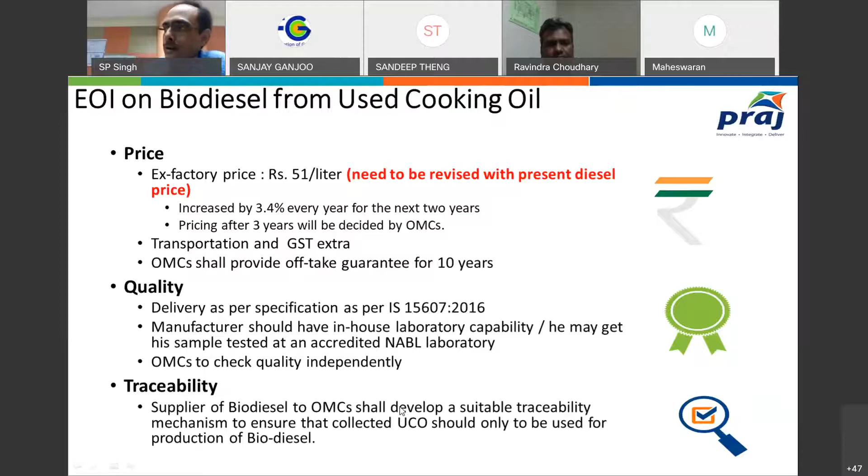As per the oil marketing companies, they will require the biodiesel meeting IS 15607 standard. And they will also trace that the biodiesel which is supplied to the oil marketing companies, preferably it should be from used cooking oil. That is also we say as a waste oil.

What oil marketing companies and FSSAI have decided: basically they have decided two business models - collection, aggregation, and conversion of biodiesel. So UCO collection from restaurants, hotels, certification by FSSAI - they will certify it, and for not allowing any misuse, we will add some denaturant in the used cooking oil. It will go for biodiesel production, and then transportation by tanker to oil marketing companies' installation, and then retailing and branding will be done by the OMCs.

Second business model is collection, aggregation, and pre-treatment by an intermediary and supply of a specific quality of UCO for conversion. So here, UCO collection from restaurants and hotels - collector trucks, cans, etc. These will go to aggregators, then to biodiesel production, and then to OMCs. They will purchase it. So these are the government initiatives.

Used cooking oil will have multiple issues - basically, these are the guidelines. Before that, I will come to health issue. Used cooking oil - some malpractices you might have heard. And if that oil we reuse for our food, then this can lead to liver problem, liver disease, blood pressure, and other diseases. That's why the government has now made a policy that this basically waste oil needs to be collected by collection agencies, and then it should be denatured, and then biodiesel produced, and then OMCs will lift up the biodiesel.

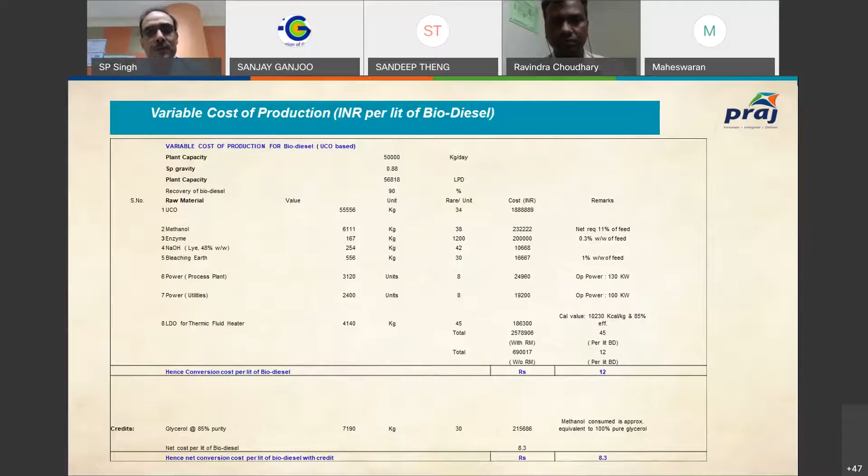I'm now opening this session for questions and answers. We'll go straight to questions related to this biodiesel presentation, and then move to questions from the previous session. So right now, for biodiesel, any questions? Any question? I think I'm unable to hear, is anyone there?

Someone has asked, can you give information on the financial aspects and economic viability of the project? Yeah, I think one question in the chat box has come about the economic viability of the project.

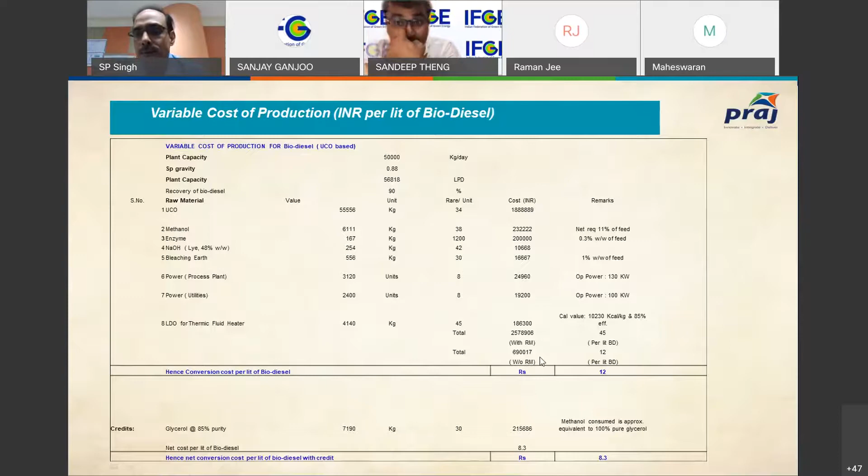One more question: cost of methanol is shown as 6111 for 1 kg of methanol, can you please clarify? This value I have given is for a capacity of 50,000 kg per day of biodiesel. So for 50,000, it is 6111 kg, and after that we converted it to a per liter basis. So this 6111 is for 50,000 kg of biodiesel per day, and then we converted that to per liter and per kg basis. I think this answers that question.

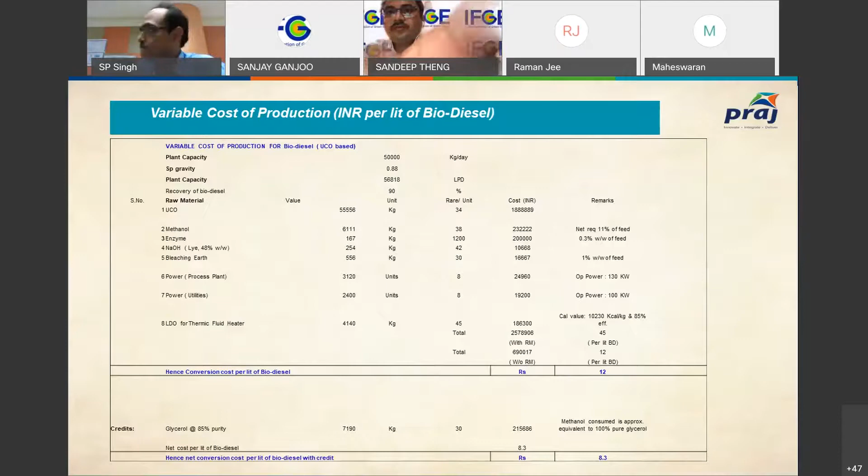We have a question: what is the cost of project in minimum viable capacity?

That's a very interesting question, and I'll give you a ballpark figure as a thumb rule. In India, plant and machinery is mostly in carbon steel, except the methanol recovery system which is in stainless steel. So in India, plant and machinery as a thumb rule is 0.15 crore per 1,000 liters of biodiesel per day. For 50,000 liters biodiesel per day, 50 into 0.15, plant and machinery will be approximately 7.5 crore. In addition, you have utilities and land development, so that factor becomes 0.25 crore per 1,000 liters of biodiesel per day including plant and machinery, utilities and land development. Multiply with your kiloliters per day to get approximate investment required. For 50 KLPD, 50 into 0.25, that's approximately 12.5 crore. If you want a complete stainless steel plant, which is not common in India but common in European countries, stainless steel is 5 times costlier than mild steel, so the cost factor goes to 0.75, and 0.75 into 50 may go higher than carbon steel. But looking at India, the factor is 0.25 crore per 1,000 liters of biodiesel per day.

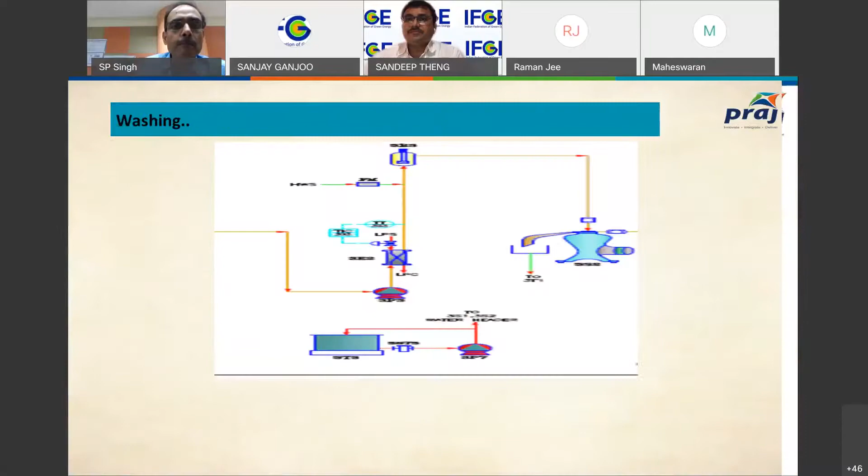The main constraint is availability of raw material, because at the moment government is stressing collection centers of used cooking oil. So if the feedstock is available, I think people will go for biodiesel.

There's a question from Mr. Chajed, Vardhaman Chajed: can we directly use this biodiesel in a vehicle? As per government guidelines, since they have calculated how much raw material is available, they are putting the number at 5%, but from a technology point of view, there is no constraint. In Europe, US and other parts of the world, there is a scheme of B100, where 100% biodiesel can directly be used in the vehicle. So from a technology point of view, there is no issue in directly using it in vehicles.

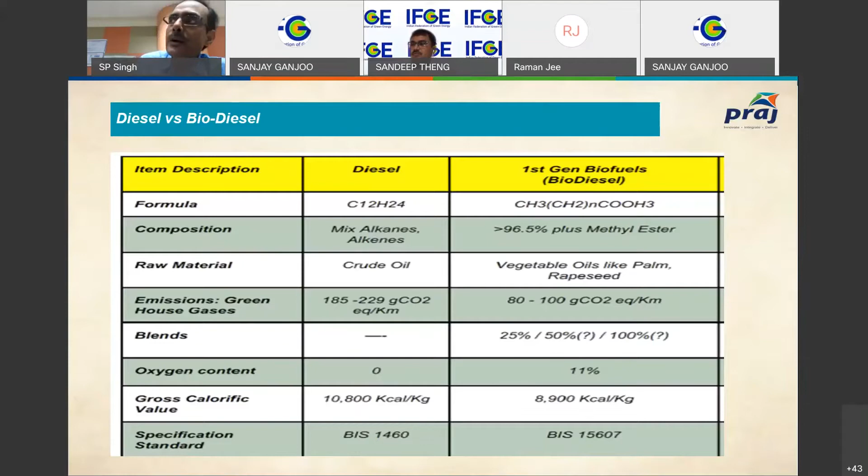Any pilot plant or anything available to see? We have done the experiment at bench scale and pilot scale at our R&D center. After that, the client for whom we are building the plant, we shared information that such plants already exist in the United States. So with that confidence, they have already gone with the large scale plant. In the lab and small pilot scale, if anybody is interested, we can show the process at our R&D center.

Okay, right, perfect. Any question, Mr. Sanjay Ambure? Hello. Any questions, Santosh Gondelkar ji? I think there is no question at this moment from participants. I think everyone is hungry and wants to break away for lunch time. So before that, we are closing the session.

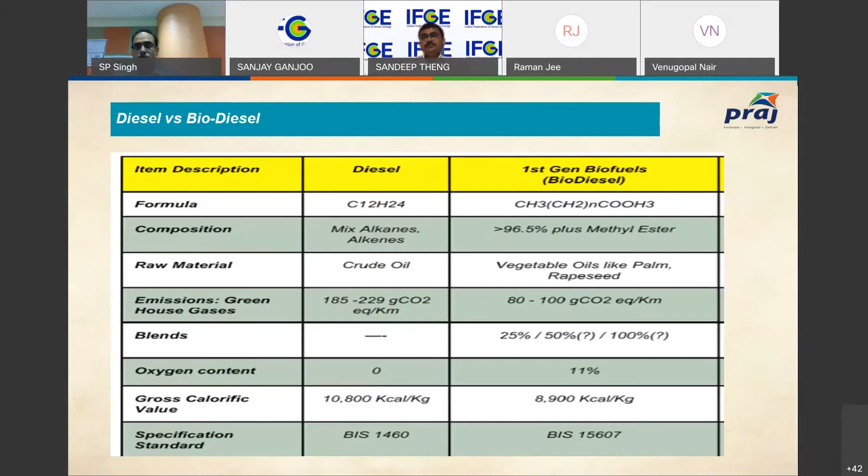We had the best of the best experienced, senior most people who are experts nationally, who have faced various situations and troubleshooting in the field. They were the right people to come here and present to the people who are actually participating as delegates today.

I'm sure they must have definitely benefited from this experience, and if they have any queries or further clarifications needed later, they can route those through IFGE, and we will certainly look at all those queries and try to satisfy them. It will be a great opportunity, and we look forward to IFGE conducting such programs again and again for the benefit of stakeholders across the country. Praj is always there to support with faculties from various bioenergy, biomobility, and bioeconomy fields. Thank you so much once again. God bless you all. Thank you.

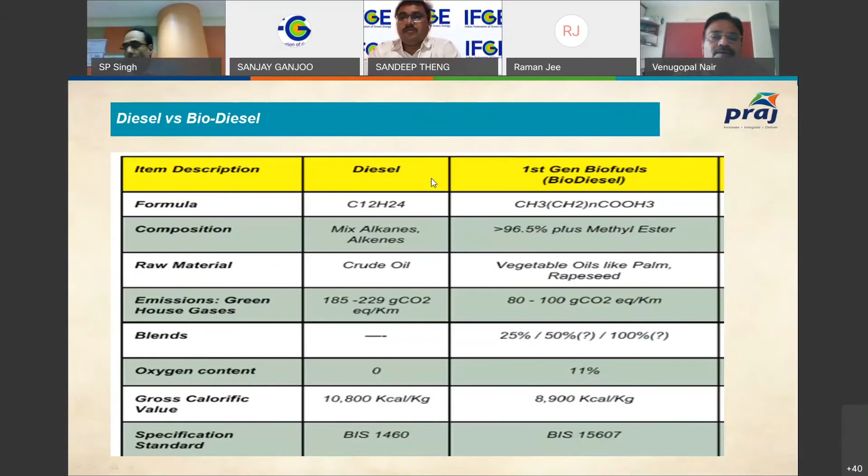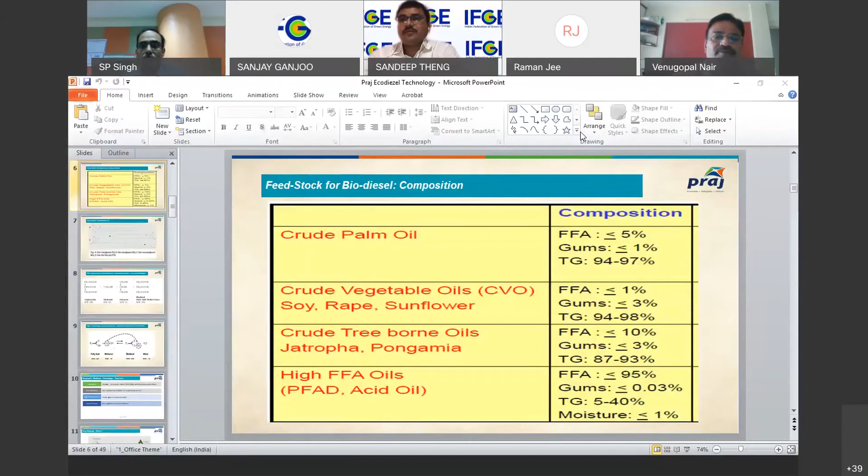Raman, now you can close. Aditi, now you can close the session. Thank you, Venugopal ji. Thank you. Right, bye. Thank you, sir. Thank you. Thank you, SP. Thank you, Basil. Thank you. Yes, sir. Thank you, sir. Yeah, thank you.

Aditi, Raman, can you close the session? Okay, sir. Yes, Aditi, you can close the session now. I think almost everyone is leaving.